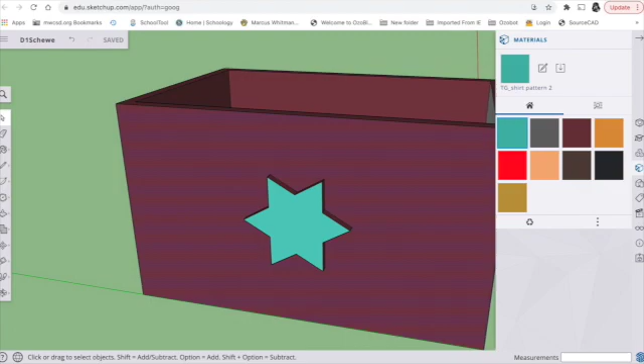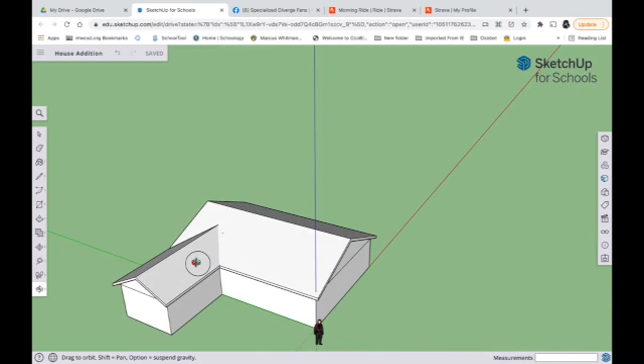This will be the last assignment for this house project on SketchUp. Today we are going to draw a front door. The front door is going to be a series of rectangles, and we'll use the offset tool, then push and pull them, and paint the door with some wood or color.

There you go, I'm going to do mine here. You can pick any side of your house to do this on. We're going to start with a rectangle, and I'm going to let you decide where you want your door on your house.

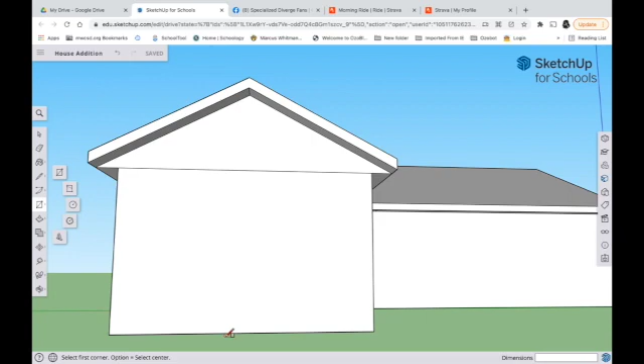Your rectangle is not going to be in the corner of a wall. You can have an unbalanced wall and put it a little to the side, or a balanced wall and put it in the middle. Just drag a rectangle out and type in 46 inches, quotation mark, comma, since it's 2 dimensions, then 83 inches, and hit enter.

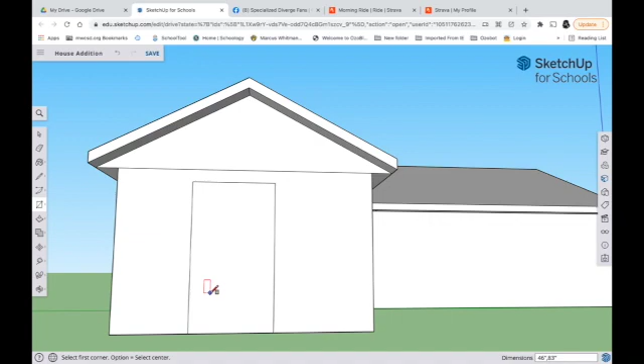This is going to be the frame and the door, since a door has trim around it. We're going to start by going to the push-pull tool and changing it to offset. Then click in the rectangle you just made and type in 1 inch trim, quotation mark, enter.

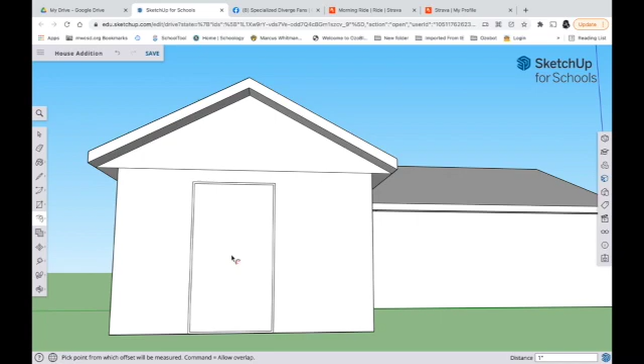So there you go, that's going to be one type of trim. Now we're going to do the same thing, but make this a 4-inch trim.

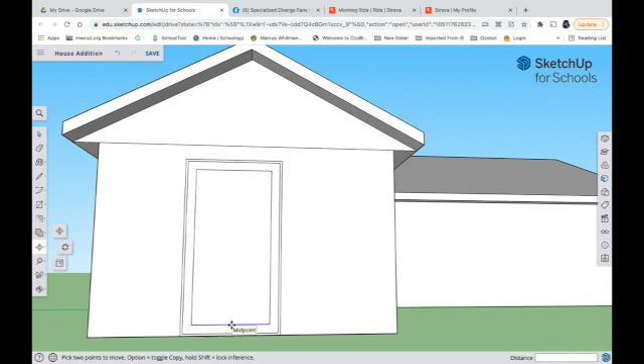I want to show you a little trick here. This is the bottom of our door, so I use the move tool, and I'm going to zoom in so you can see this. I'm going to grab that midpoint and drag it straight down to that line. So this is our door, this is our trim.

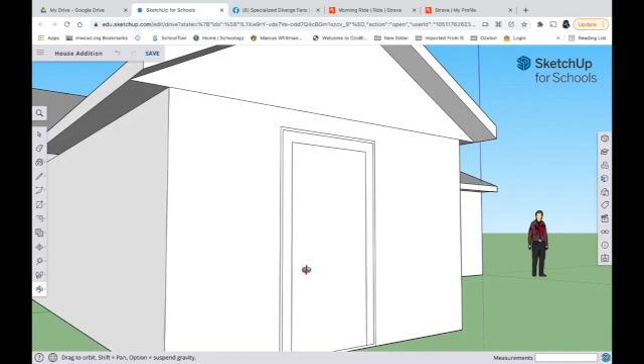Before we go any farther, let's rotate this a little to see it at an angle. The narrow trim is going to come out, we're going to push or pull it out.

I need to get right in on that, it's important to get right in the right spot. See, right now I got the wall I don't want, so I'm going to pull that back. There it is. I'm going to pull that out 1.5 inches.

Now this one, I'm going to pull out 1 inch. If you look at this now, you'll see that I can figure out how to zoom, right? Now that's the doors in here, and this is actually the house trim.

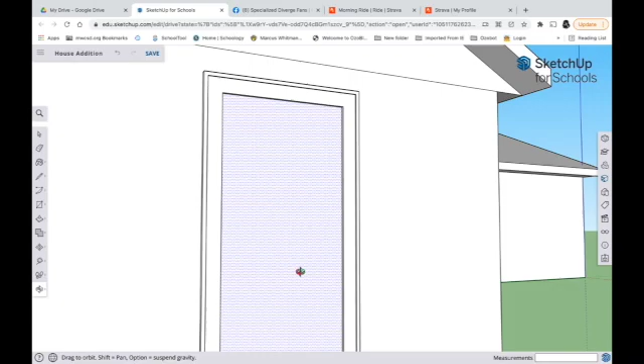So let's draw our door inside of there now. We are going to start with some lines. I'm not going to make this measurement specific, but you should make it look like this.

We're going to draw some lines. I'm going to come up, notice that that's the midpoint. Let's start at the midpoint, and we'll draw a line straight across. It should be green like that.

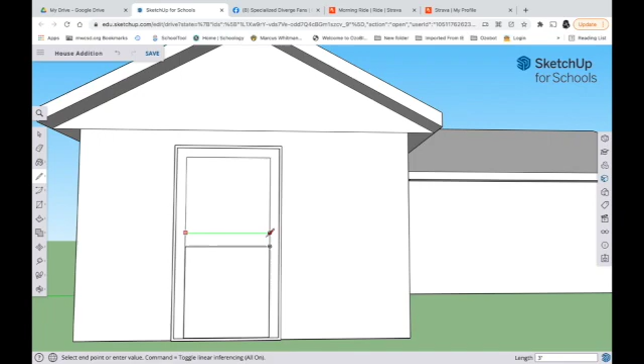Then we're going to come up a little bit more and draw another parallel line there. This is going to be wood panels at the bottom, and we're going to do glass at the top.

When you have a front door, it's interesting - do you want a solid door for security, which is harder to break into, or do you want glass so you can have natural light come in and see outside the door? You have to consider those things when you put a front door in.

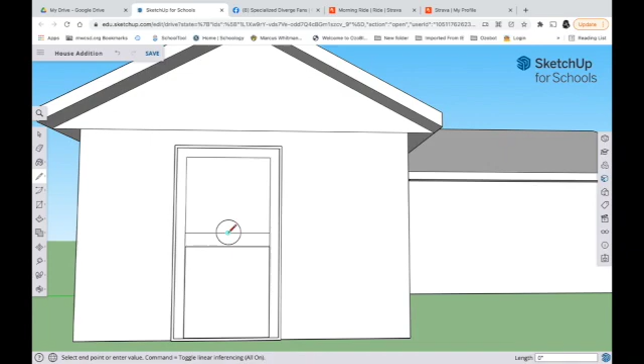So here we go, we're going to draw the top part of the door now. This is the midpoint, and I'm just going to draw a line straight up there. Then I'm going to find this midpoint and draw a line straight over to there, and find the midpoint on the bottom and draw a line straight down to there.

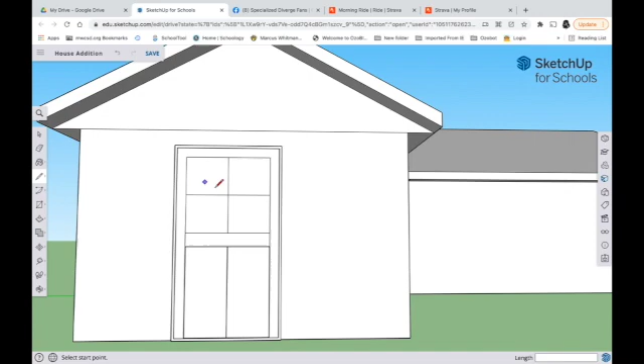So we're going to put windows here and here and here, and these are going to have wood panels, and I want to have frames around all of that.

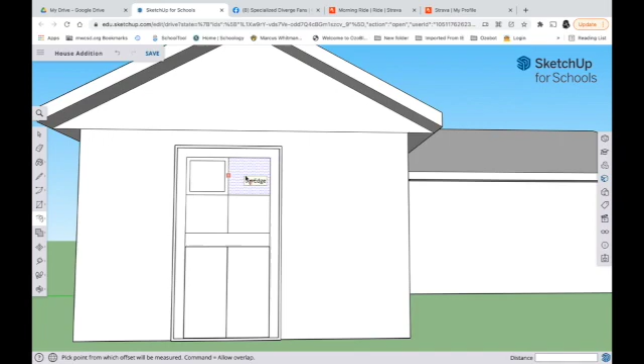I'm going to use the offset tool - you bring your offset tool over and click on the rectangle and type in the dimension 1.5 inches and hit enter. Go to the next one, 1.5 inches, hit enter. Next one, 1.5 inches, hit enter. The next one, 1.5 inches, hit enter.

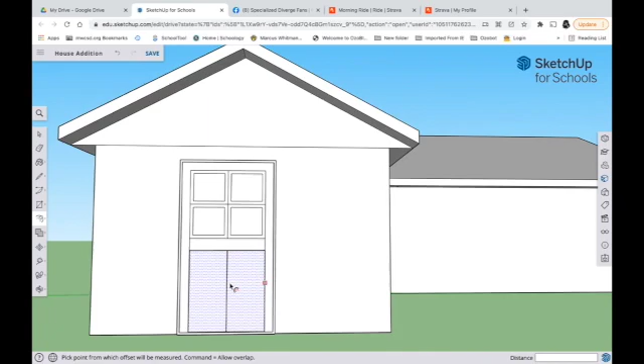Now we did this - where did we do this? We did it on windows on the other side. Notice that when you go over this, this whole thing is polka dotted, which is a problem because I want to separate it. So I'm going to put some rectangles on both of these pieces just to make sure it's two different things and not one.

So this is highlighted out here. I know that's a problem, so I'm going to try. There we go. Okay, I got that highlighted. Now I can go to the offset tool and go over that and type in 1.5 inches and then click on this one. Nope, it's not going to work.

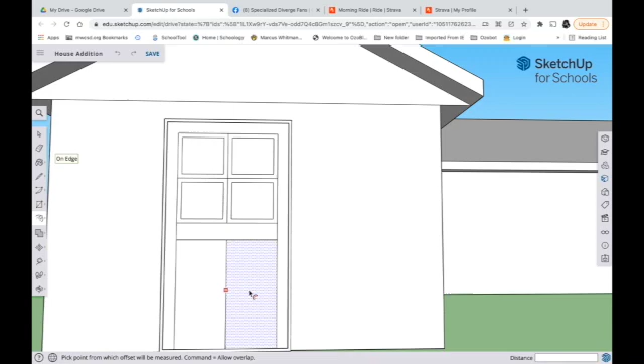Something about the program gets weird here. There we go. I had to hit the select tool and select that, and now I can go over here and do 1.5 inches and hit enter, and I notice that my other one is not there now. Let me see if I can try that again.

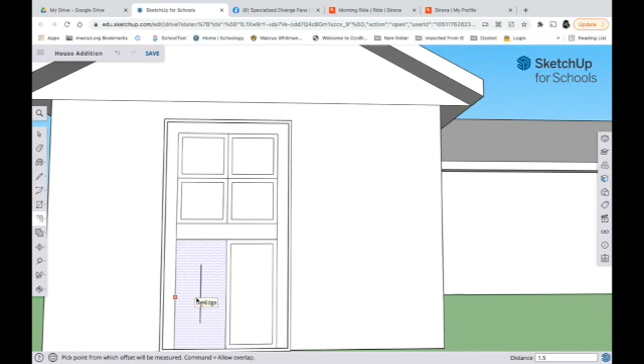Some things aren't easy, are they? Let's see if this works. Yes. Okay, so the next thing I want to do is push these back a bit.

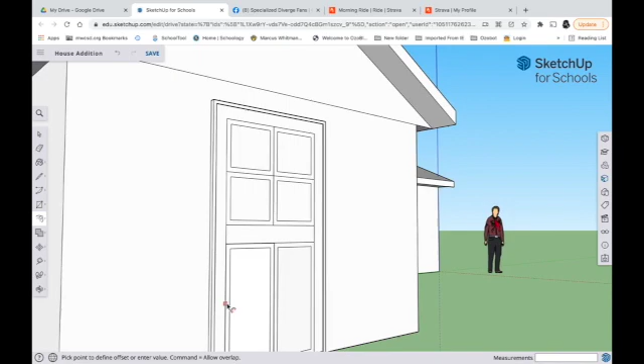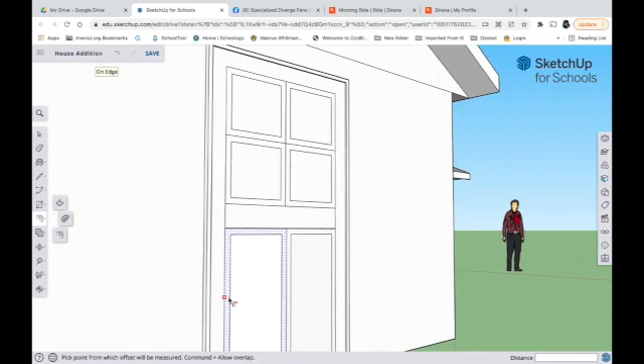Alright, let's start with these down here. Can we click on this? That's not really what I want. Let me undo that. Go back. Alright, so I'm going to click this and now get that. And I want to push that in maybe 1/4 of an inch. So that's 0.25 inches.

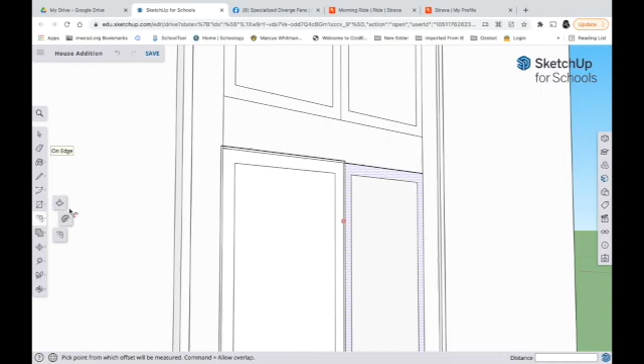And I'm going to do the same thing over here. So it's acting a little funny. I'm going to click that, and you know what I think I did? I think I did an offset there instead of pushing it in like I wanted to. So I'm gonna have to back up. So that's a problem.

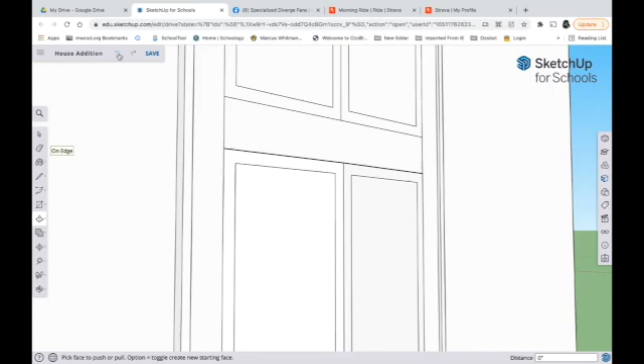Okay, bear with me, folks. I'm gonna back up a little bit here. All right, let's try this again. First, I'm going to select this, then I'm going to push it back 0.25 inches. Enter. I can't even tell if it worked.

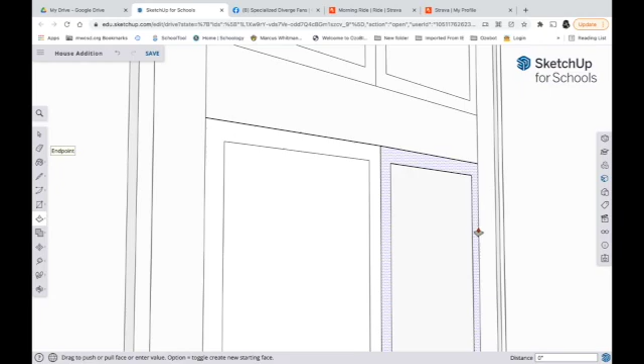Oh, SketchUp. Why you got to be like this? So much for a great video. Let's see how this goes.

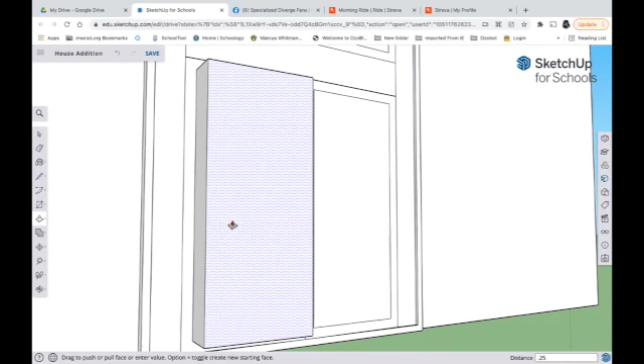Maybe I should just work on the top part for right now. Tell you what I'm going to do. I'm going to try something. Instead of pushing that, I'm going to pull this out 0.25 inches. That's good. That works. 0.25 inches. So that just sets that panel off a little bit from the frame.

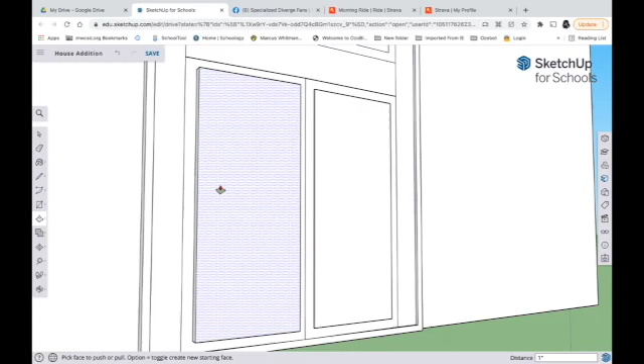I'm okay with that. That's fine. Alright, so what I'm going to do now is—I just screwed up and moved the wrong thing again. Alright, 0.25 inches.

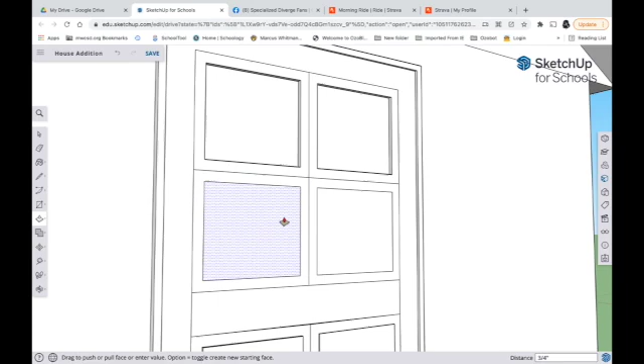Alright, so I want to come up here. Let's see if I have a little better luck with the top part. So I am going to click on the glass and I'm going to push it in. How about 0.75 inches? Push it in 0.75 inches. Push it in 0.75 inches and 0.75 inches.

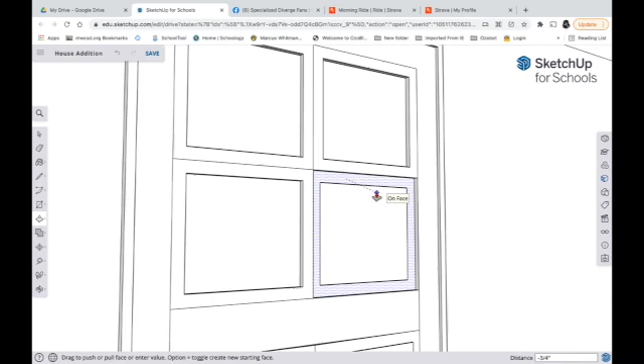Alright, so these are all pushed in a little bit. And I'd also like to push the frames in a little bit, but not as much. So I'm going to do 0.25 inches. That didn't seem to work. Let's see. Try it again. 0.25 inches. That worked.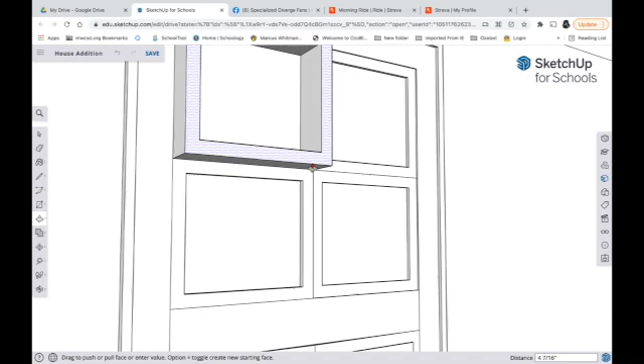And then you could do that, because I'm just going to grab those edges instead of trying to do the measurement. Alright, so now this is all inset a little bit. That's good. You can see it's inset here at this edge, and it's inset. That's just to give you a little definition.

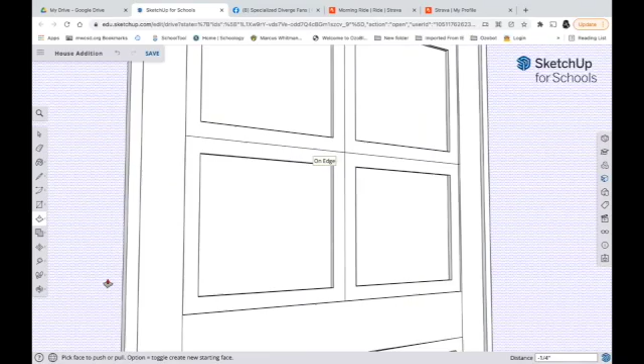Okay, so the last thing to draw would be a doorknob. And if you go to your circle tool, you can put your doorknob over here somewhere and click and drag out and type in 2 inches. Pretty big doorknob, but you can make it smaller if you'd like.

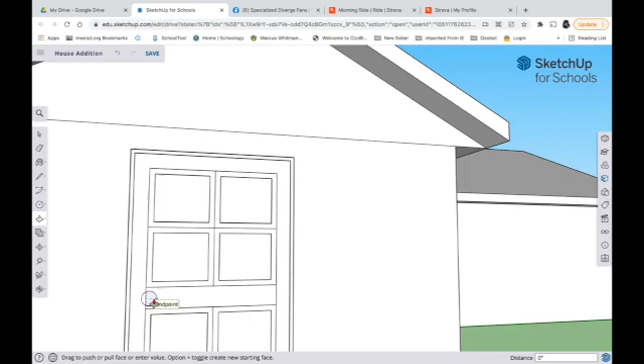And then I'm going to click on that and pull it out an inch. And looking at this, I can tell I got a little problem where it's doing 2 parts, and I'm going to pull this one out even with that. And I could get rid of this line, but I think when I paint it, it'll be okay.

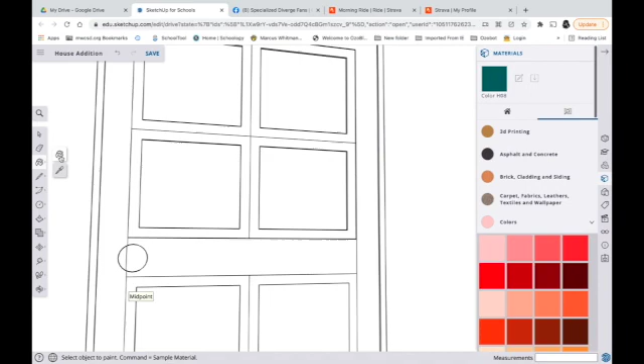So let's look at the painting of things. So we're going to do the paint bucket, and I'm going to pick, for my doorknob, I'm going to pick this metal mirror color and put it in there. I think that works. Alright, now you got choices for your door.

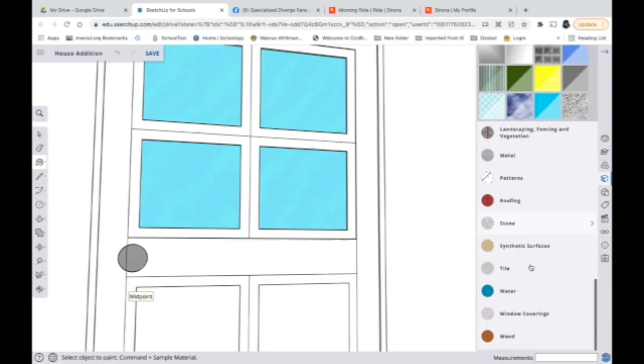Let's start with the glass. So we can do the glass. Alright, and then you can make your door a color, or you can make your door stone if you wanted, or you can make your door wood. The wood's kind of weird looking. I'm not a big fan of the wood, so I'm gonna go with this green.